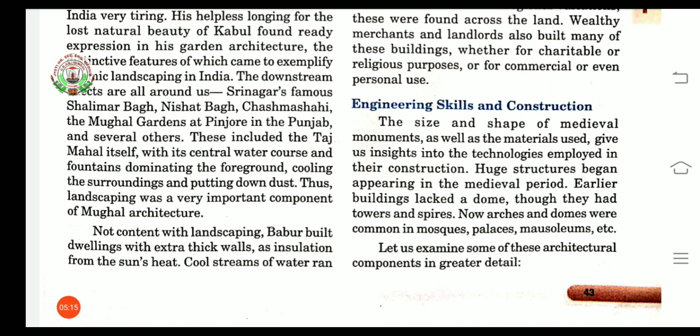The Muslim rulers were very fond of this architecture and were great patrons of architecture. They all adopted the indigenous, meaning very native, style, using domes and true arches in their architecture on a very large scale.

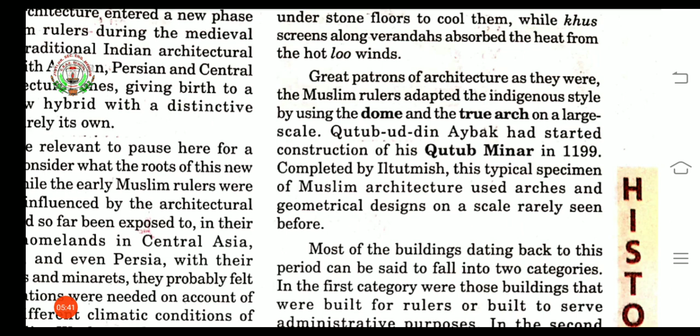Now I'll show one picture that you have to identify. Can you identify this monument? Yes, this is Qutub Minar. The construction of Qutub Minar was started by Qutubuddin Aibak in 1199, but it was completed by Iltutmish, because Qutubuddin died.

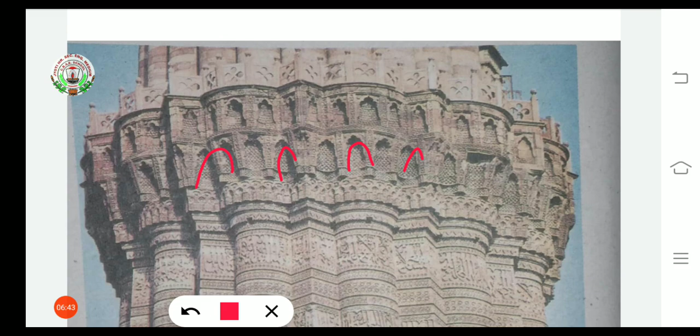This typical specimen of Muslim architecture used arches and geometrical design on a scale rarely seen before. Here you can easily see the arcs, and there is a combination of arcs and geometrical design. You can see the corners here. This is the balcony of Qutub Minar, where we can easily see all the arcs and geometrical design. This is very rare, and we do not commonly see this kind of pattern in other monuments.

If we try to divide the monuments of this period, we get two categories. The first category includes buildings built for the ruler or built to serve administrative purposes. The second category includes those built for public utility, meaning for public use, such as mosques, temples, tanks, wells, bazaars and caravan serai, sarai meaning a lodge.

As the region and land are different, people were making structures based on the region and area. Not only emperors and kings were making these structures, but wealthy merchants and landlords were also making these buildings.

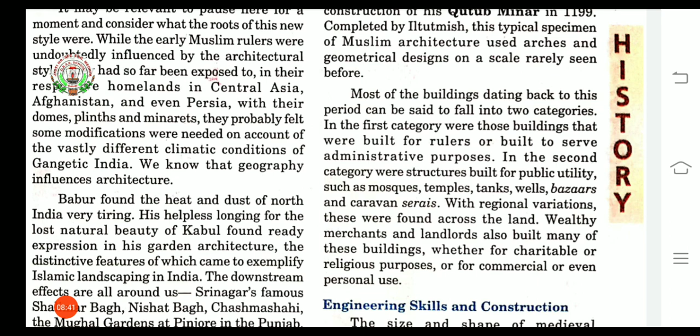Now the size and shape of the medieval monuments, as well as the material used, gives us insight into the technologies employed in their construction. Insight means capacity to understand or gain accurate deep understanding. When you see these great structures, we think how this was made and which kind of material was used, because all these structures are very old.

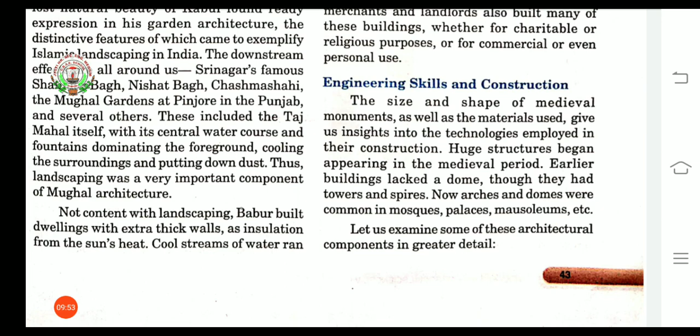Earlier, huge structures did not have dome-like structures, they only had towers and spires. Spire means a tapering structure kept on top of the building in a conical shape. After the medieval period started, the monuments of that period had arches and domes, which were used in mosques, palaces and mausoleums.

First is Trabeate or corbelled. In 7th to 10th CE, this kind of monument was used. This style was used in temples, mosques, tombs and buildings, attached with large stepped wells, called baolis in Hindi. In this style, roofs, doors and windows were made by placing a horizontal beam across two vertical columns. This architecture is called Trabeate or corbelled.

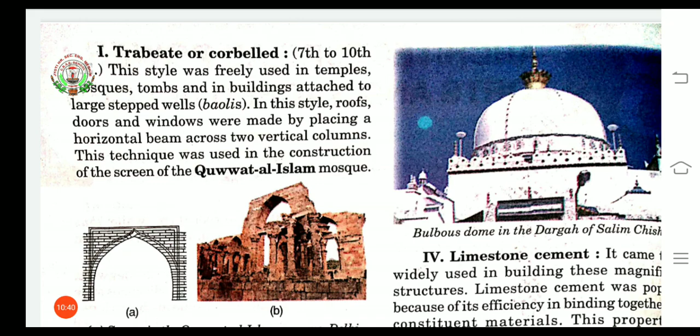Here we have one picture. Down you can see the picture of Quwwat-ul-Islam Mosque. Here first two pictures are shown, A and B. A is the screen showing the structure of Quwwat-ul-Islam Mosque. Screen means a flat vertical surface in which pictures are shown. B is the corbel technique used in the construction of the screen. So A is the screen and B is the actual construction.

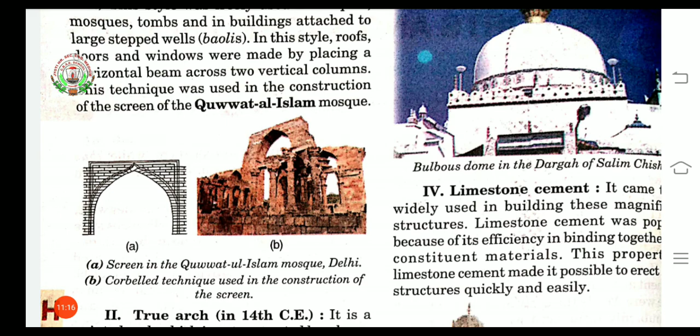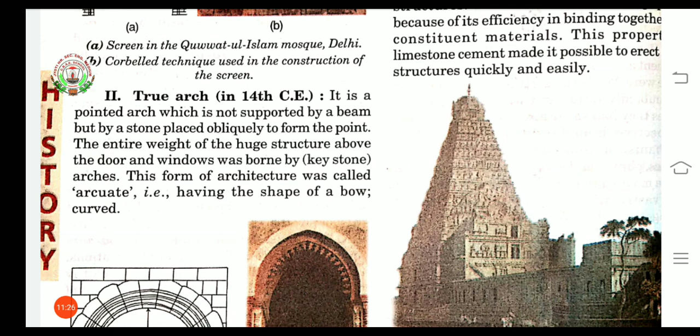After this we have the true arch, which started in the 14th CE. It is a pointed arch. Here you can see in the picture it is a kind of pointed arch which is not supported by any beam, but by stones placed obliquely to form the point. No beam is there, but the stones are kept like that here.

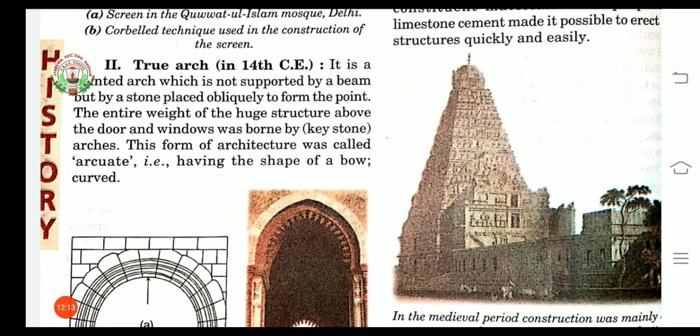So the entire weight of this huge structure above the doors and windows was borne by the keystone, that is called an arch. This form of architecture was called arcuate, having the shape of a bow or curve. Down we have a picture of this true arch, first the screening, and the B part that is the actual construction.

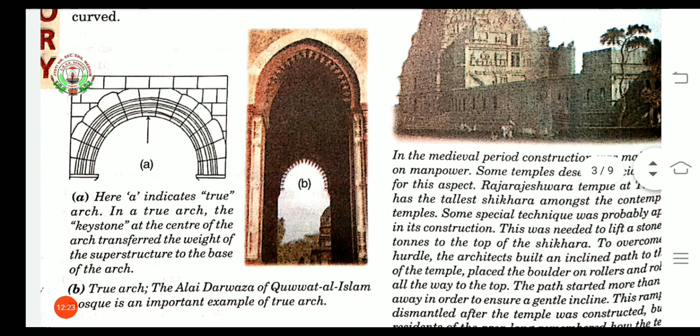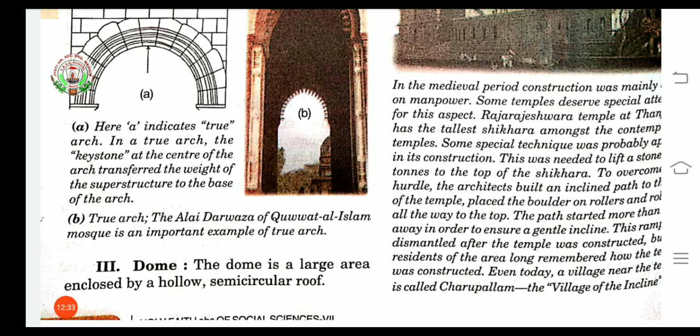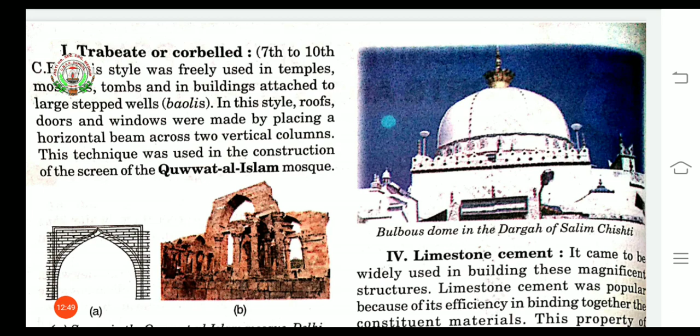After this we have limestone cement. At that time it became very popular in building structures. This limestone cement was popular because of its efficiency in binding together the constituent material. This property made it possible to erect huge constructions quickly and easily. So this limestone cement was binding together all the constituents used for making the building, whichever construction was made, and it was making it possible quickly and stronger.

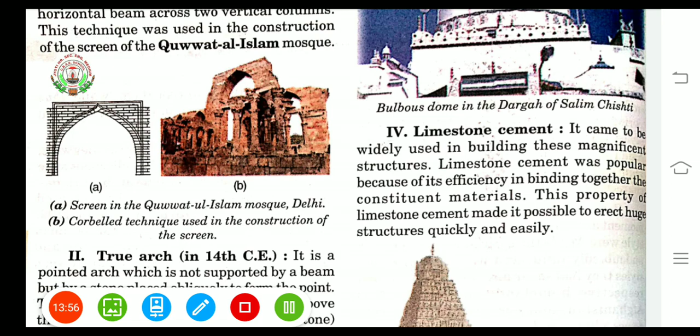The medieval rulers had a number of architectural achievements, as they made a lot of structures. During this period, both Hindus and Muslims made beautiful mosques and temples for worship. They made these temples and mosques not just for worship, but to show their power, prestige and wealth of the patrons. At that time it was a kind of subject to make temples or mosques so they could show their religious fervour and their power to other people.

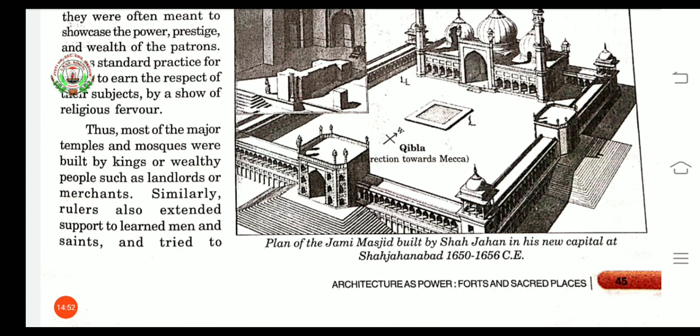Now you can see the picture of Jami Masjid, the plan of Jami Masjid that was built by Shah Jahan in his new capital, Shahjahanabad, between 1650 and 1656 CE.

When these major temples and mosques were built by kings or wealthy people like landlords and merchants, what were they thinking? They were making these structures so that other people would support them, and they would try to change their capital, as was done by Mahmud of Ghazni.